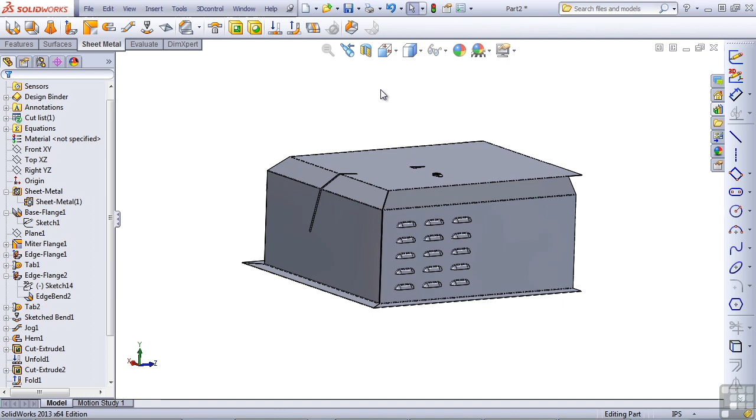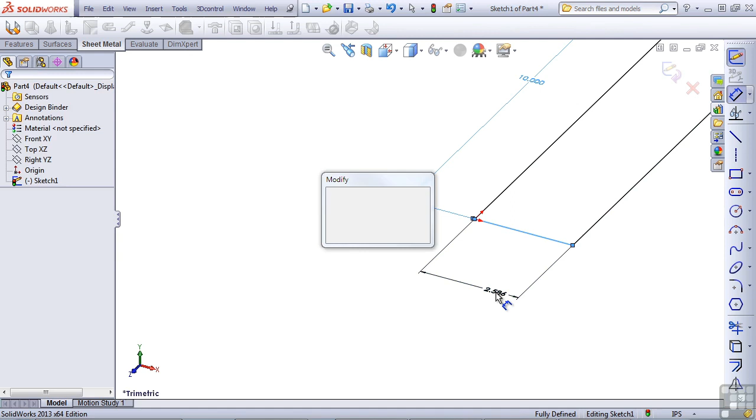In this lesson, we're going to go through how to create a couple of parts using the insert bends method. There are a couple of types of parts that can only be created with this method. So let's get started. I'm going to create a new part from an Infinite Skills template, and this is going to be one of our favorite parts, the rectangle. Okay, let's just add some dimensions so we get a sense of scale here. Let's make it 10 inches by 14. Press F for zoom to fit.

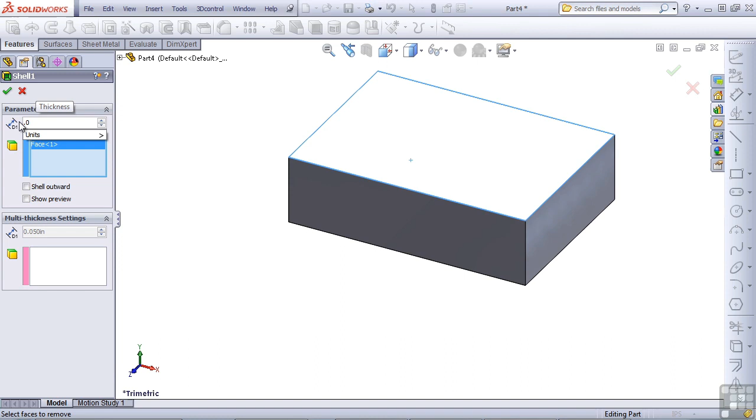And instead of using sheet metal features, let's just switch over to the regular features tab and use an extrude. Extrude this 4 inches. Next, I'm going to use the shell command and shell this out to a thickness of 0.29. And now I will switch over to the sheet metal tab and use the insert bends technique. I want to have a fixed face that stays stationary when everything else flattens out, so that's pretty easy to select as the bottom of the box. I'll establish the default inside radius. Also, the bend allowance and auto relief, we'll leave those at default values.

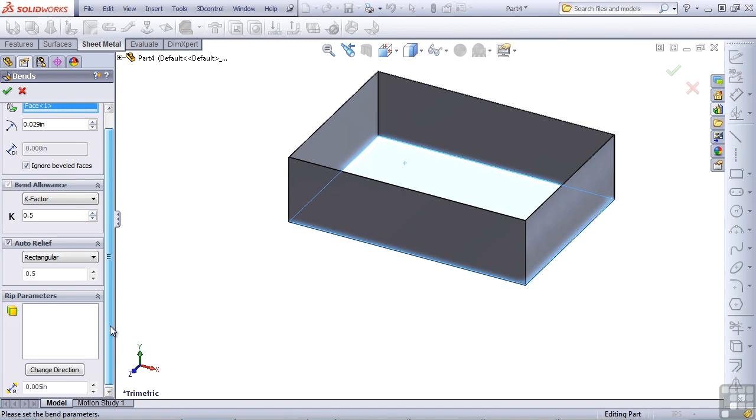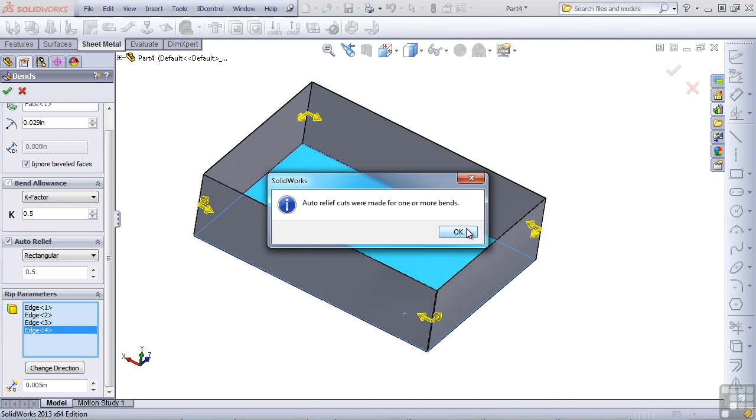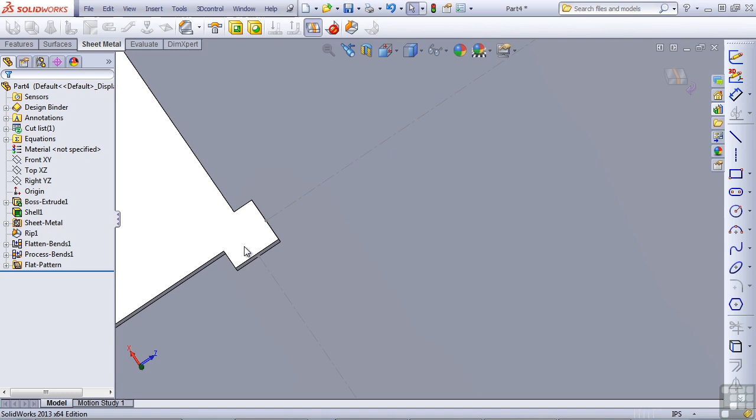Rip parameters, I'm going to select the inside corners of each of these corners, and SOLIDWORKS is going to rip these out so that it can all be flattened. Once you've got everything set, press the green check. So SOLIDWORKS is telling us that auto relief cuts were made in the corners to allow for the bends. And if we take a look at this, we can now flatten out the part. We take a look in the corner, you can see what SOLIDWORKS has done to make the auto reliefs work. That's because the bend is coming in together, and if these bends overlap in any place, that creates geometry that's a little too complex for SOLIDWORKS sheet metal. In the formed up state, these corners look like this.

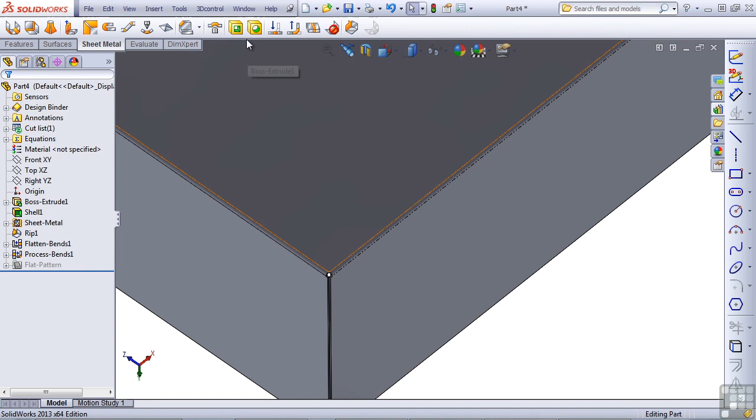So you can see that the feature tree created by an insert bends process is very different from the feature tree created by the base flange process. Let's tile the windows to show these feature trees side by side. So I'll go to Window, Tile Vertically, and while one has a lot more features than the other, you can still see that there are some major differences between how SOLIDWORKS has dealt with these two different processes for creating sheet metal parts. The old method has a feature that's called flatten bends, so it takes your sharp-edged part and flattens out all the bends, and then it reprocesses the bends, and then at the very end it will flatten them out again. This is kind of a confusing process, and it's part of the reason why SOLIDWORKS developed a new method.

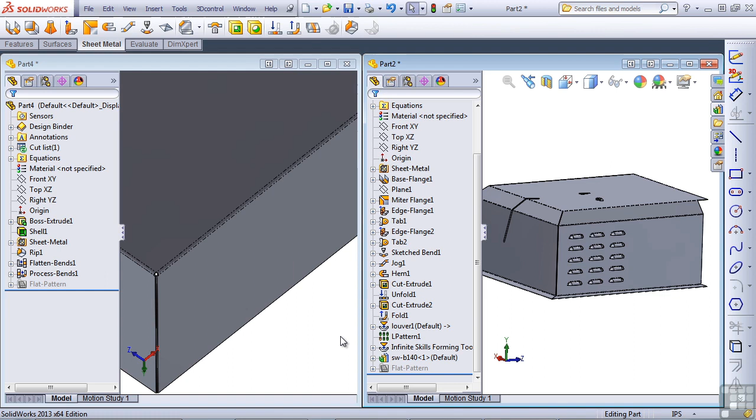In the new method, you just start out with sheet metal and you work with sheet metal features all the way through. And then at the very end, SOLIDWORKS will flatten out the part for you so you can get a drawing of it. This is a much more straightforward method. It's very powerful. It has more options available. But if you were to create a part like, say, a rolled cone, there's no way to do that without the insert bends process. Let's go through creating a rolled cone in SOLIDWORKS.

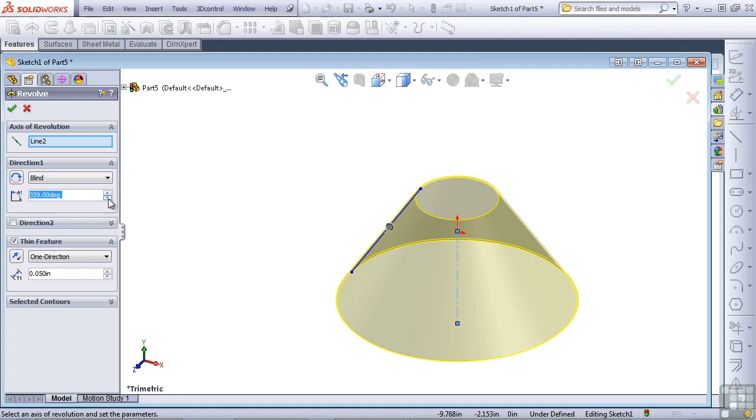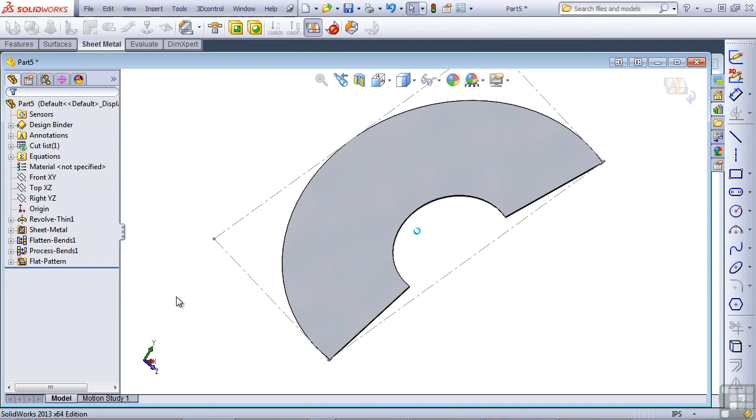I'll draw an angled line and a straight construction line. And using just regular features, I'm going to revolve the sketch. And I don't want SOLIDWORKS to close the sketch for me automatically. I'll set this to 359 degrees rather than 360, so it has an open end and is able to flatten out. And now we'll use the sheet metal, insert bends, and grab this edge to flatten it out. If you need to design this type of part, the insert bends method is the only way to do it. Let's form that up again so you can see it.

Again, when I revolved it, the trick here is to revolve it 359 degrees instead of 360, so that it has an opening and can be flattened. This part will be saved in your Infinite Skills Working Files folder, so you can refer to it if you need to look at the example.